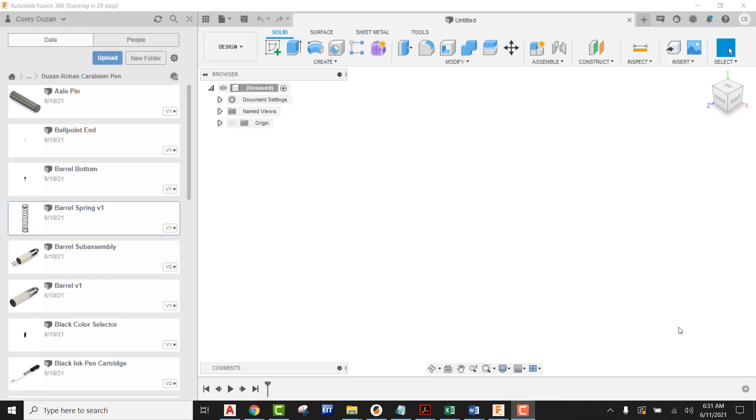The first thing I'm going to do is a save in my new design, making sure I'm looking in the folder where everything is at. I'm going to save this as red ink cartridge subassembly. All right, so that has been titled.

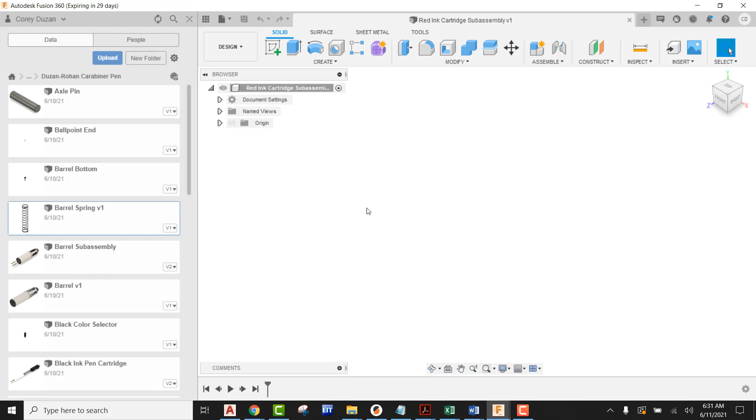Now we're going to start bringing everything in that we need. I'm going to scroll down and find my red color selector, and drag that in. Once that comes in, I can reorient this using our dials, setting it flat at 90 degrees. Then coming out to our point, we're going to drag that off the original origin, and say OK.

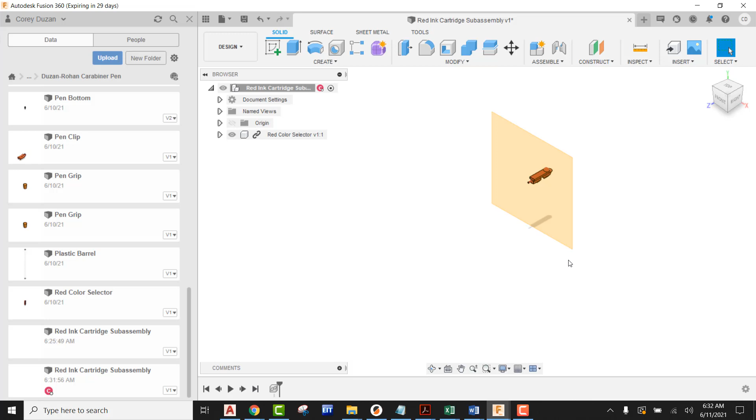Right now we can see we have some work planes coming in with this, and I feel like those are going to get in the way. So for right now, I'm going to come down to my display settings, into object visibility, go to all work features, and shut everything down. We just have to remember that we did that, because there are some things later on that might not be showing up, so you'll know to toggle that back on in case you need to see them.

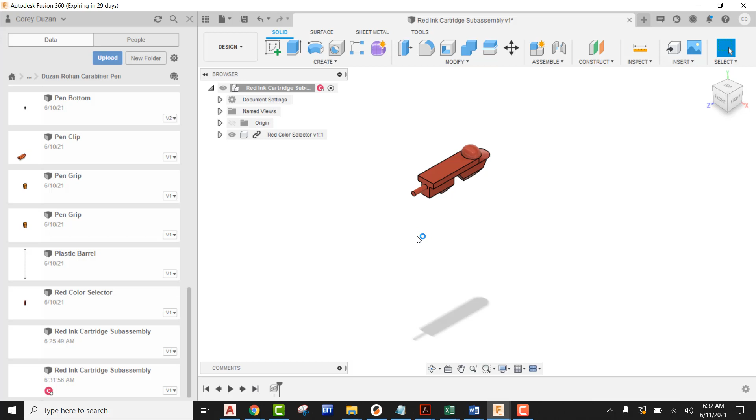All right, so we have a red color selector. We're also going to find our plastic barrel, which is for the ink pen portion of this. Once again, we use our dial to get this into the correct orientation, grab the dot, pull this out, and say OK.

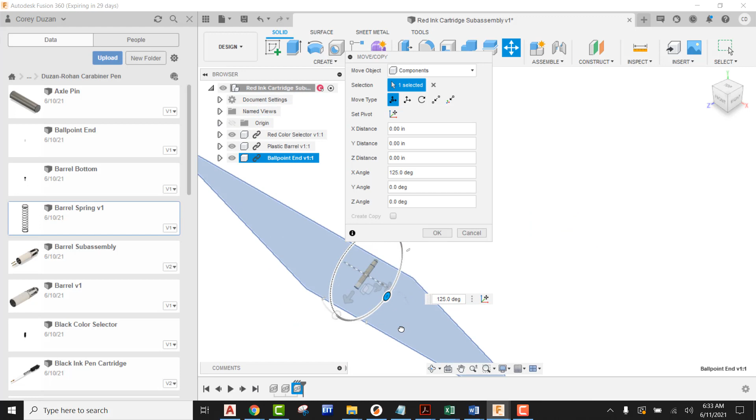If we come up here, we can also find our ballpoint end. We're going to drag that across the line, pull that in, and once again reorient this with the dial. There we go. Then we drag this off the origin using the dot, and say OK. Finally, we're going to need the barrel spring.

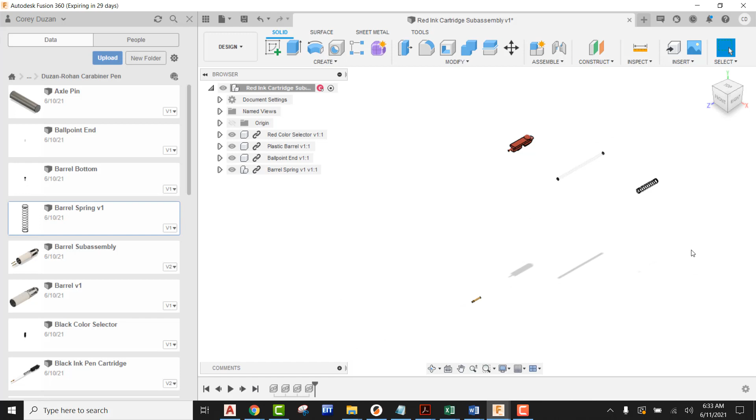We're going to bring that in. It's already in the correct orientation, so we can just grab it by the dot, pull this out, and say OK. All right, so now we are ready to begin assembling this.

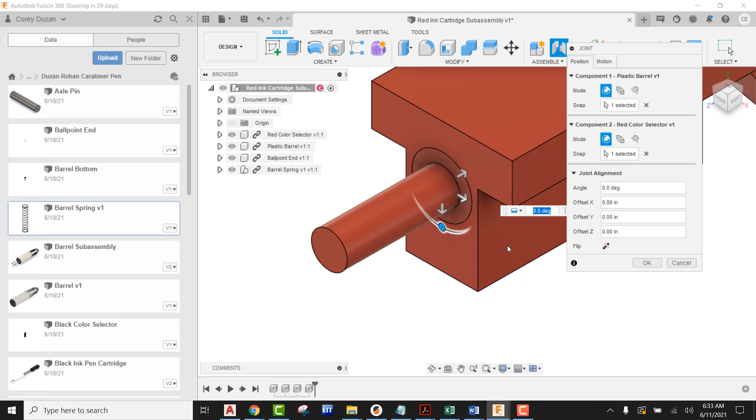Coming up here, we're going to go to Joint. Right here at the end, we pick on this origin, and then at the base of the cylinder we pick on this origin. When that comes in, if it's not in the right orientation we can always spin it with the dial, but in this case it needs to be flipped. Once we hit flip, we say OK. We do have to make sure that this is rigid — yep, it is rigid, so we can say OK.

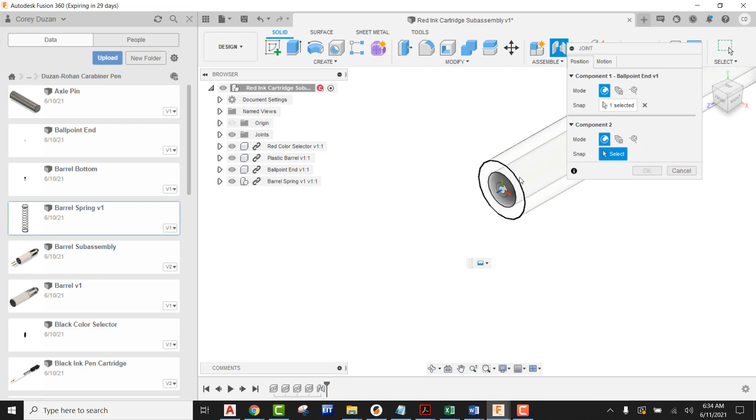Now we can start working on our ballpoint end. Once again using Joint, we come here to the end of this, find the joint origin, and then come to the end and find our joint origin there as well. That brings it in. It's in the right orientation, but the issue is there's really no good connection to that plastic barrel, so I'm going to grab the arrow and send this in the right direction — we'll bring this in a distance of 0.1 for my offset, and say OK.

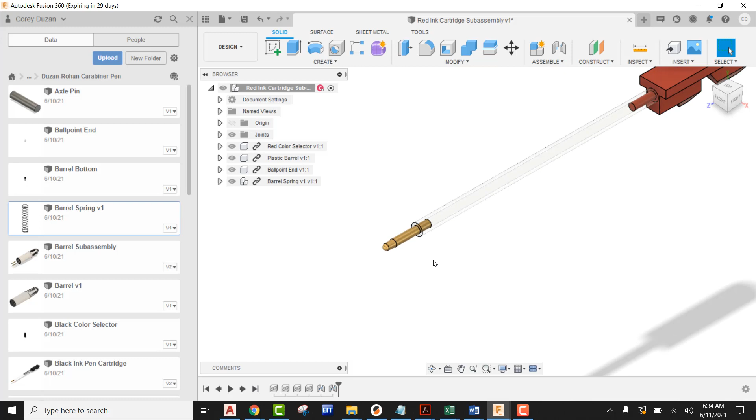And once again, that was rigid — here's rigid, just making sure we're good to go there. The last thing we need to do is bring in our spring.

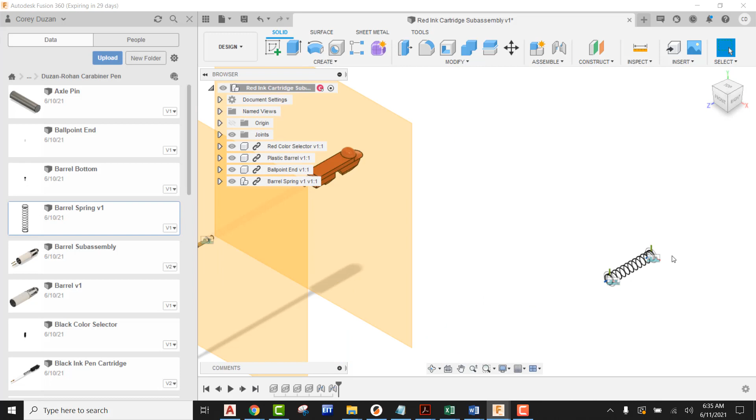Before we get to our spring, come out here, go into your object visibility, and turn on all work features, because we need to see the joint origins that have been placed here at the ends. You're never going to see them unless you turn that on, so make sure you do that.

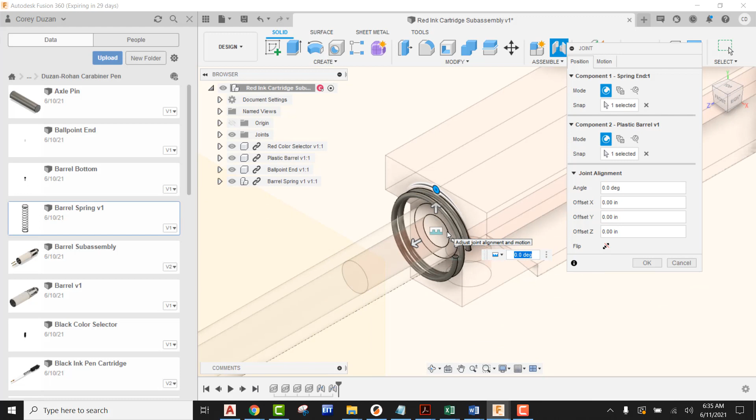I'm now going to come to my joint origin on the end, and then come right here to the end and find this joint origin at the center of that. Now we can see that spring comes in. If you're looking at this and thinking there's only one part of the spring, let's go ahead and say OK to that — you'll see the rest of it comes over with it. Once again, that would be a rigid joint.

So if we come down here, go to display settings or object visibility, and turn off all work features, we can see that this is a completed ink cartridge subassembly. That's going to be the video tutorial you'll use for red, green, blue, and black, for our carabiner pen project.